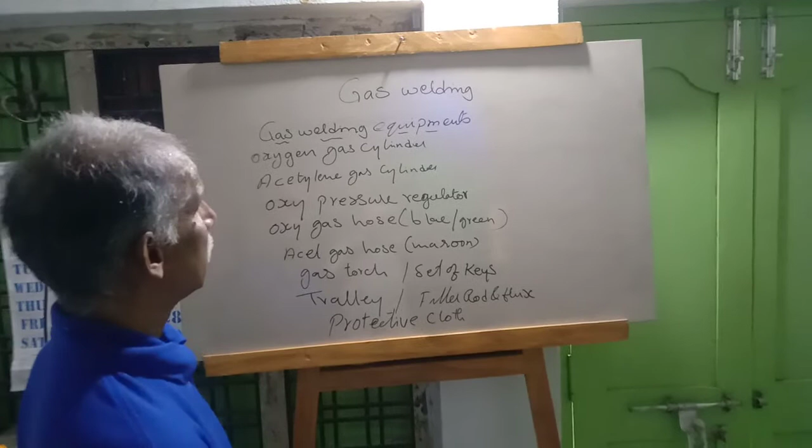So, the last class we were learning about gas welding, how gas welding works and what gases are used for gas welding. Now, to do gas welding, there are different types of equipment we have to use to complete that work. Let's see what all are written here.

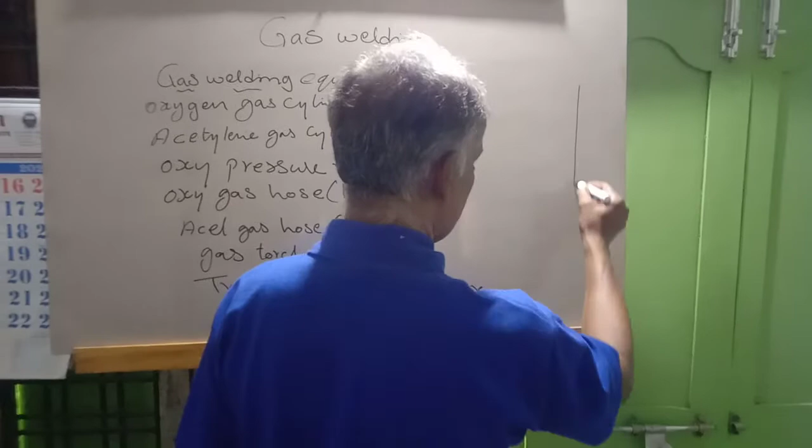Okay. Now the first one is the oxygen gas cylinder. This oxygen gas cylinder is the same as our cooking gas cylinder, the way we use gas cylinders. This gas cylinder is very tall, made with cast iron, completely one single piece made with cast iron, and having a valve system here.

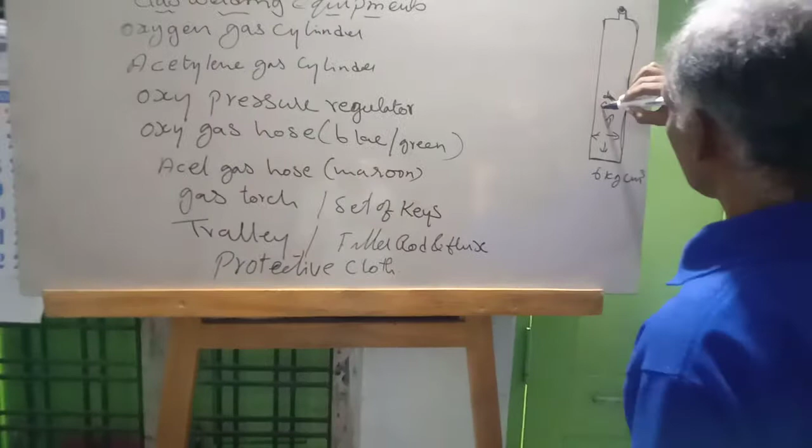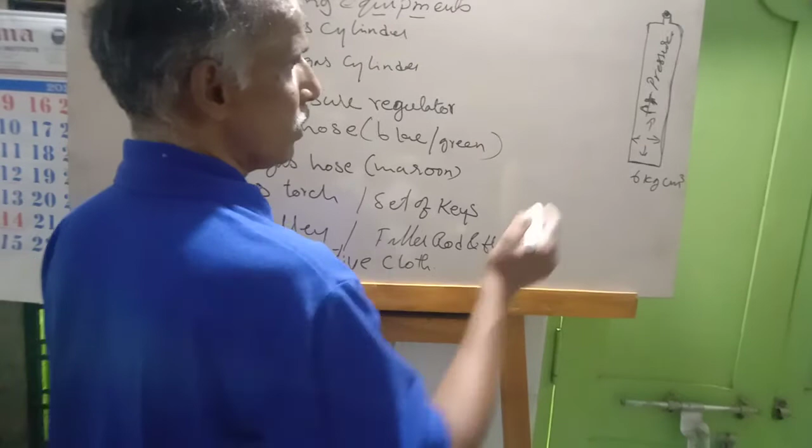And oxygen is filled in this with a pressure of 6 kgs per centimeter square. That is the oxygen pressure inside this cylinder. So it is very dangerous if the nozzle where the gas is coming out, the mouth of this cylinder, is leaking. You have to be careful. Keep it aside. It will be very dangerous.

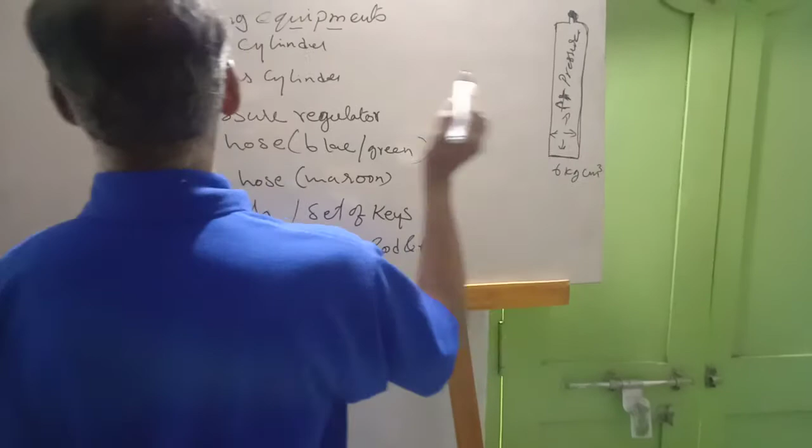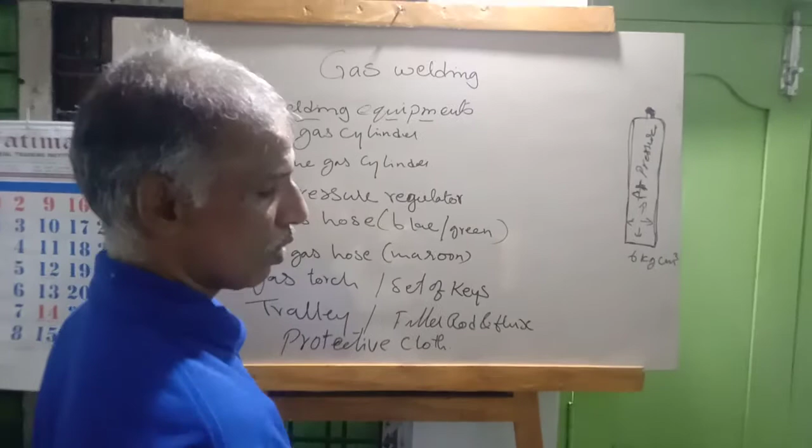Okay. Now this oxygen cylinder which we use has to be handled carefully in vertical position only. With cooking gas, people sometimes put it down and roll the cylinder to take it. You should not put these cylinders down and roll them. They should be transported vertically from one place to another place.

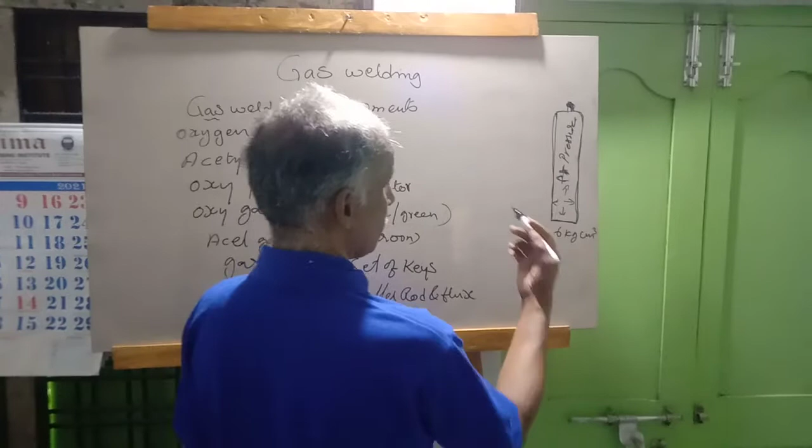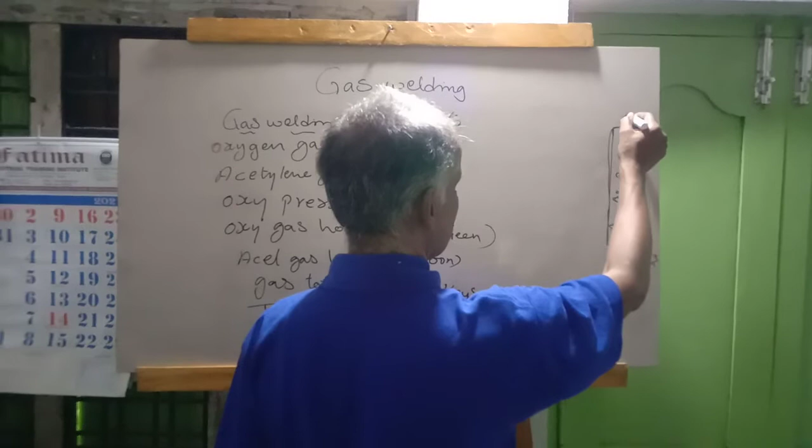And the same way, the acetylene gas cylinder also we have to handle. Approximately the same pressure is also in this cylinder. And when we are using this gas, it has to be transferred from the cylinder to a gas welding torch through the pipe, the hose pipe.

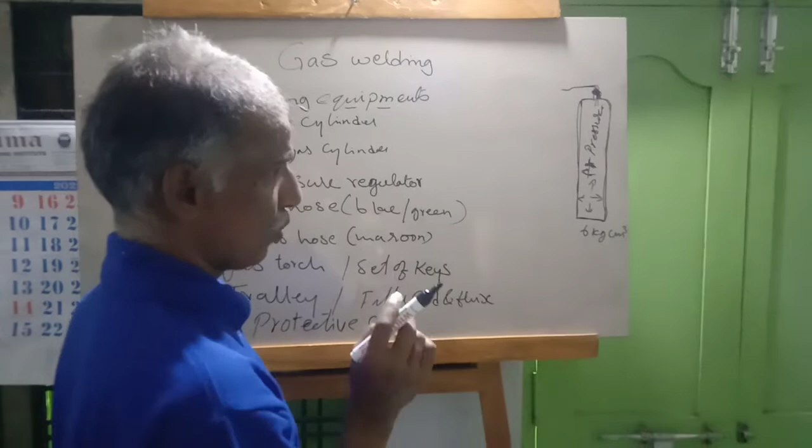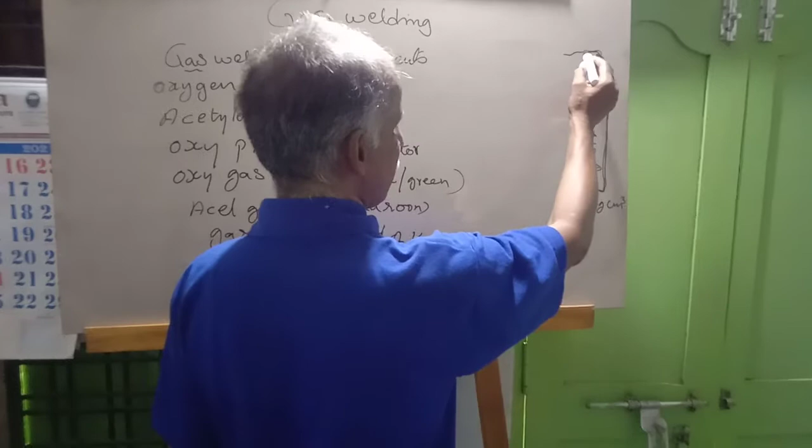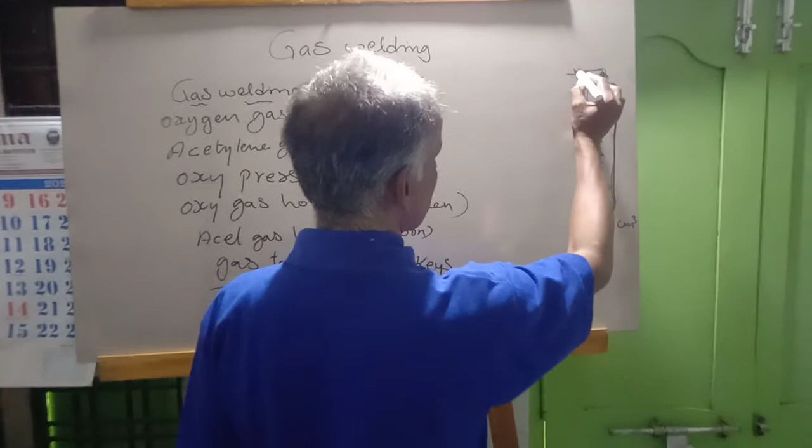Okay. So when you are supplying this gas through this pipe, you should regulate and send only as much gas as is required. If you open the pressure too much, the pipe will expand like a balloon and it will burst. So be careful how much it can withstand. On the hose pipe, the pressure it will withstand will be written. So how will we know how much pressure of gas is going through this pipe?

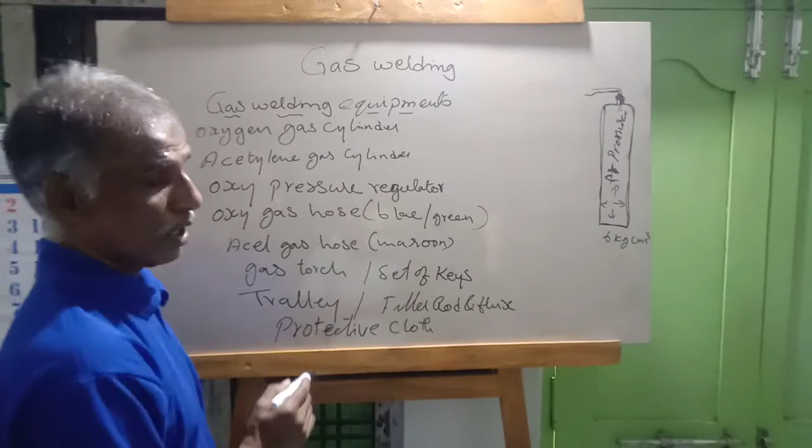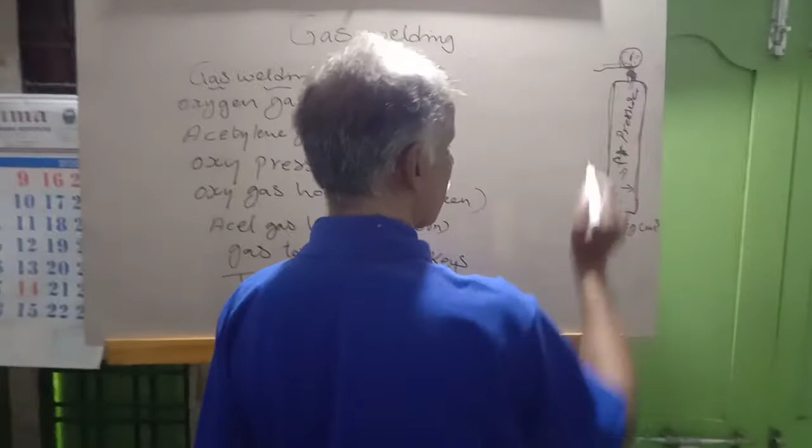For that we are using the oxygen pressure regulator. Here one regulator will be there, which has a dial and a handle. When you open this nozzle, we have to use the correct type of equipment to open it. Don't use the wrong equipment, for example keys or a spanner. It should suit perfectly.

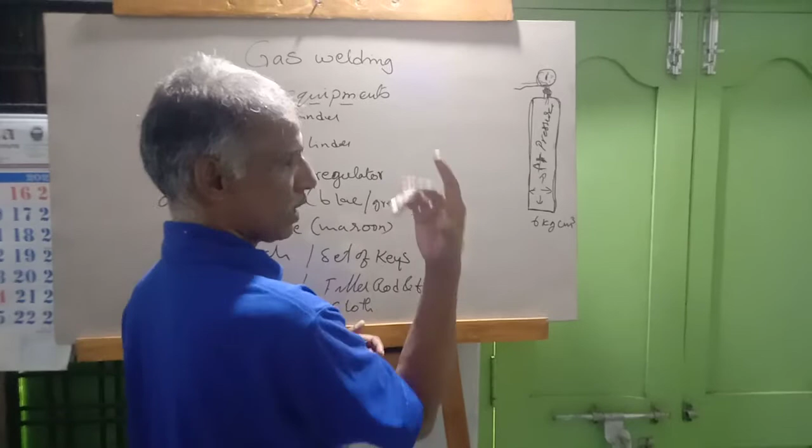Don't adjust using other keys, loose or tight spanners, hitting on it. Because the cylinder has a brass fitting at the top, it can be very brittle, it will break and the gas will leak. So if you notice that gas is leaking, keep the cylinder to the side.

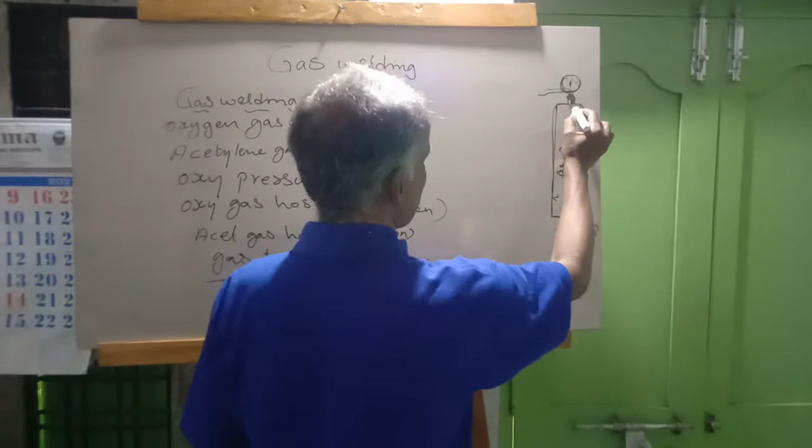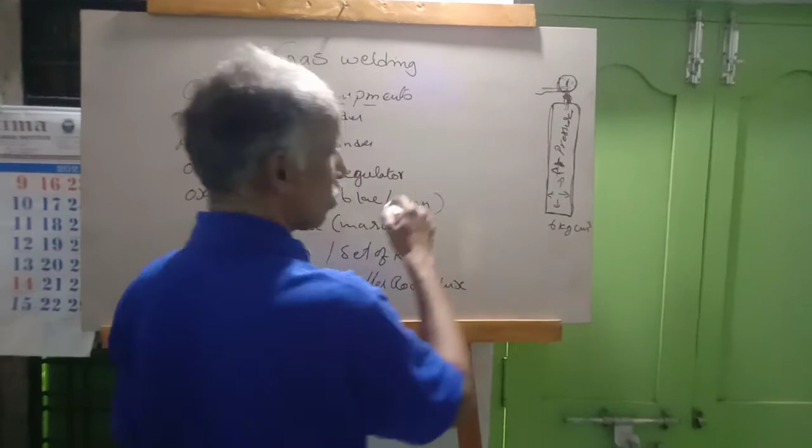Now to connect to this cylinder, we connect the regulator to the cylinder, and we supply the gas. When you are supplying the gas, the dial will show how much pressure you are sending. The gas sent through it will not directly go out of the torch. Near the torch we have one more regulating system, a valve, like a tap at home. However much water we want, that much we open, and that much water comes.

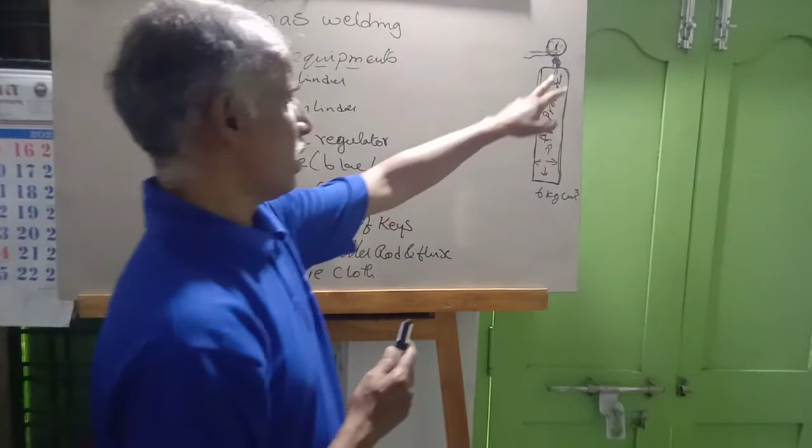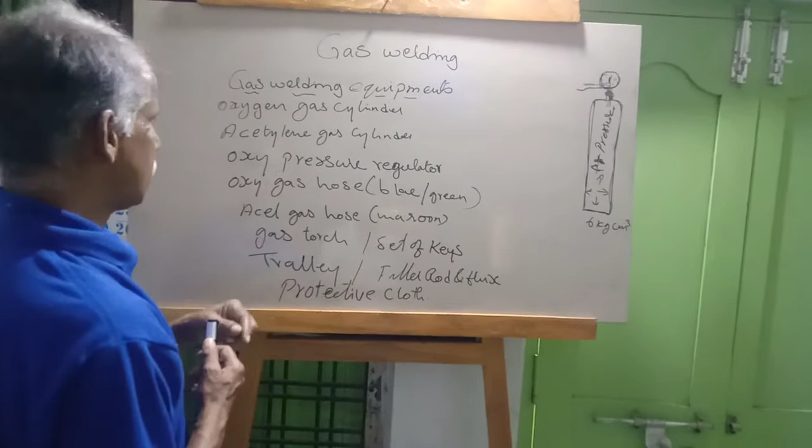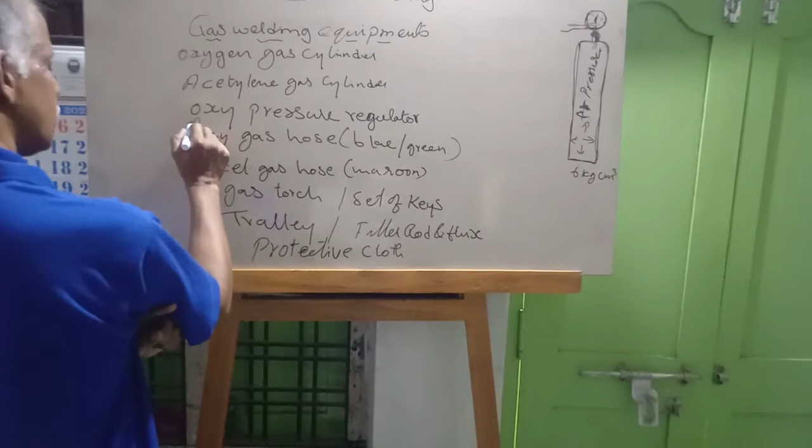Same way, we have one more valve, which is adjusted by rotating the thumb nut. So the oxygen pressure regulator is fixed here, and for the acetylene gas also we have to use an acetylene gas pressure regulator for the other cylinder. These are both cylinders. Okay.

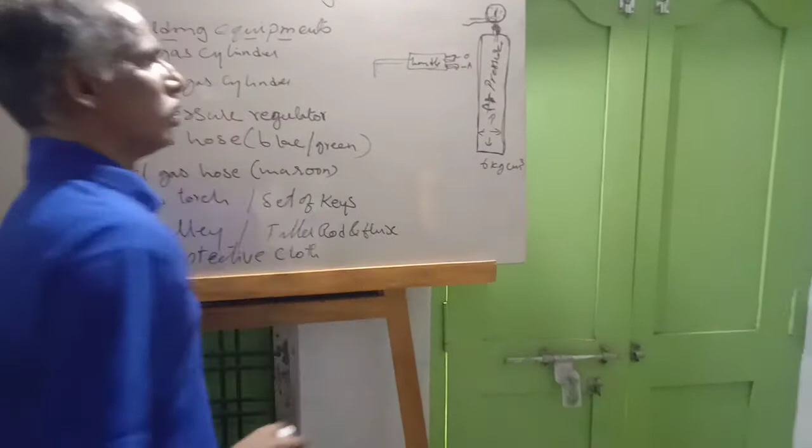Now, the oxygen gas hose pipe. Let's see the pipe. This is a torch. Two inlets are here, one for oxygen, one for acetylene. This is the handle. We have to send the oxygen and acetylene through this. Here we have two valves which adjust how much oxygen goes.

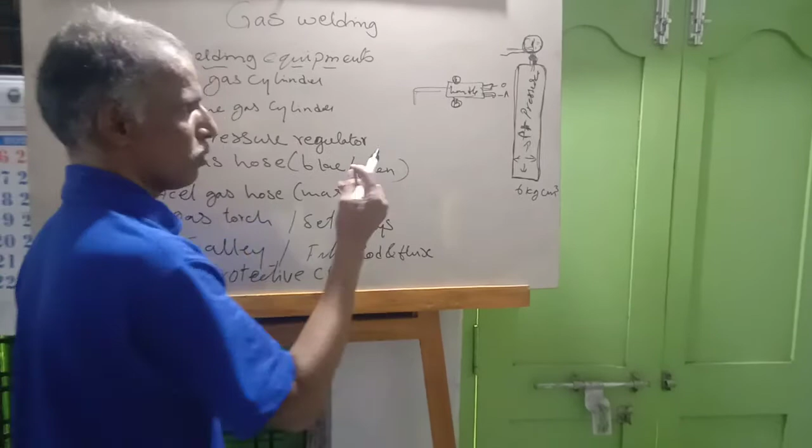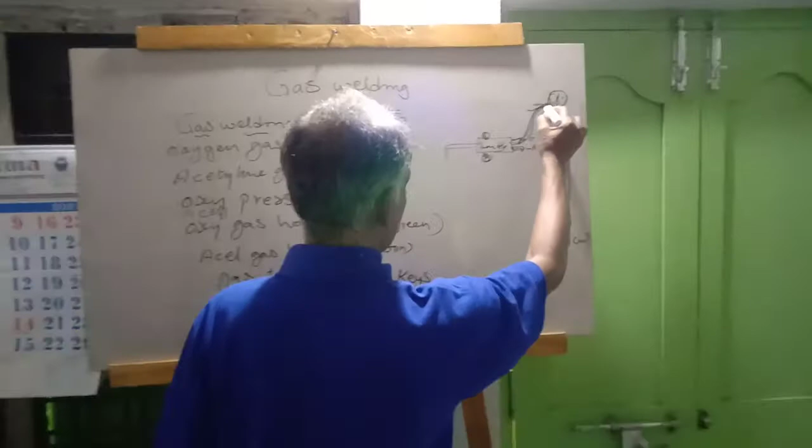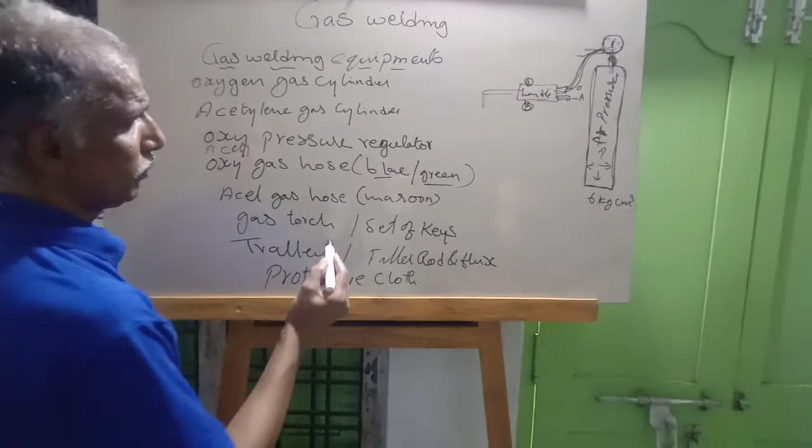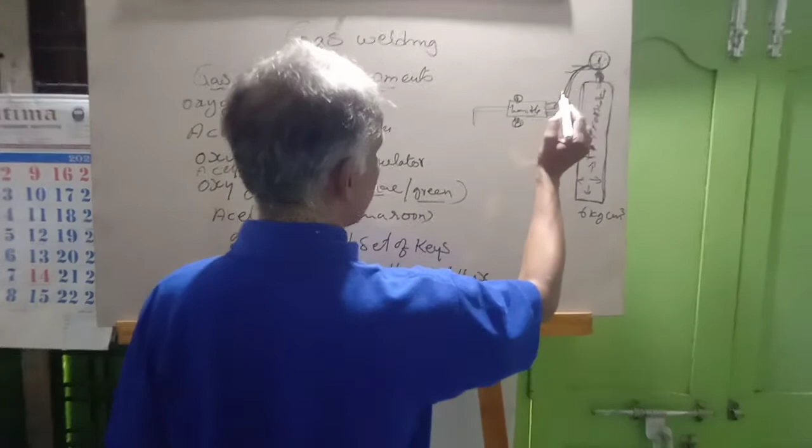To fix the hose pipe from the oxygen cylinder to the torch, we should use a blue or green colored pipe. Blue or green pipe. Okay. Sometimes people misuse it and the green pipe gets fitted elsewhere, and when handling you will get confused. So the oxygen connection has to be fitted systematically.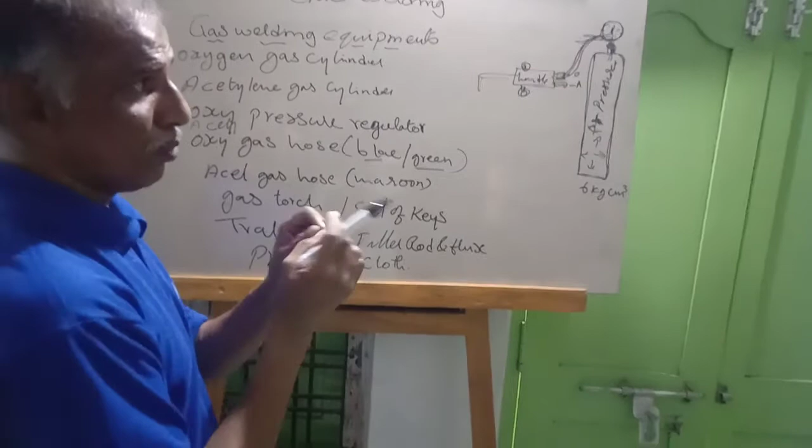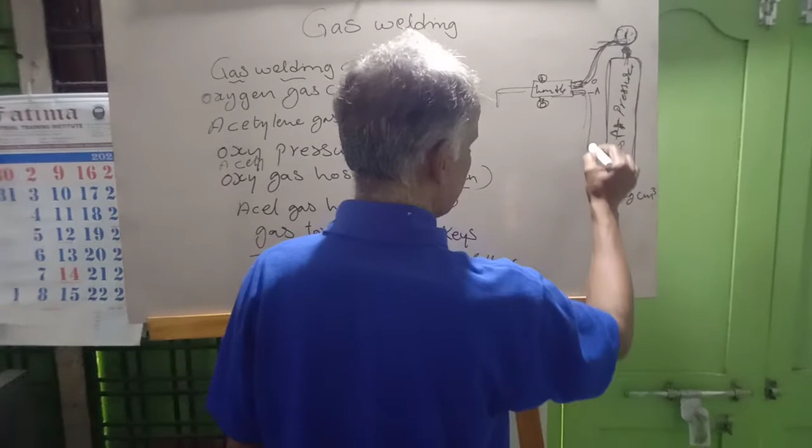For the torch and regulator, we have a union nut and bolt system to tighten it. And here we have a clamp; sometimes we use hose pipe clamps. So what color should this pipe be? Blue or green. Now for the acetylene gas hose pipe, the pipe color we have to use is maroon.

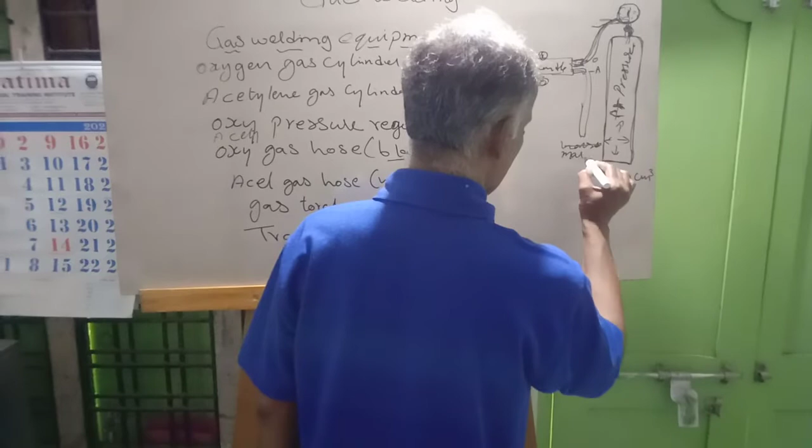Okay. What happened now?

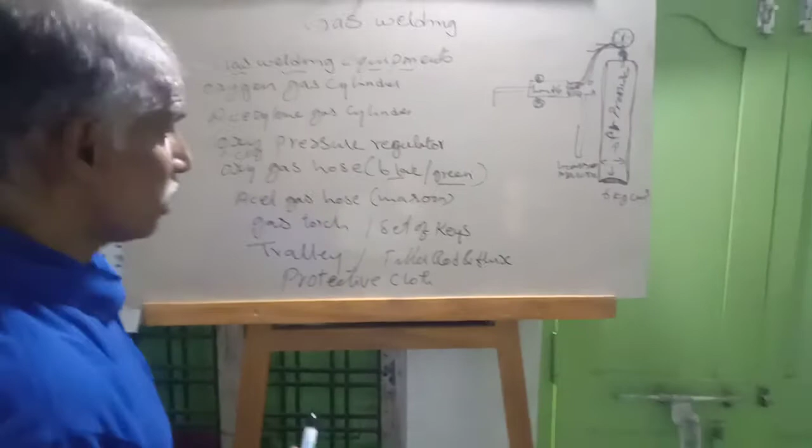So for the cylinders also, at the bottom it will have a concave inside. At the bottom, they will put the color for oxygen cylinders and acetylene cylinders. See, both the cylinders will be the same height and the same way. So to recognize them, at the bottom they will paint the color, maroon for acetylene and white for oxygen.

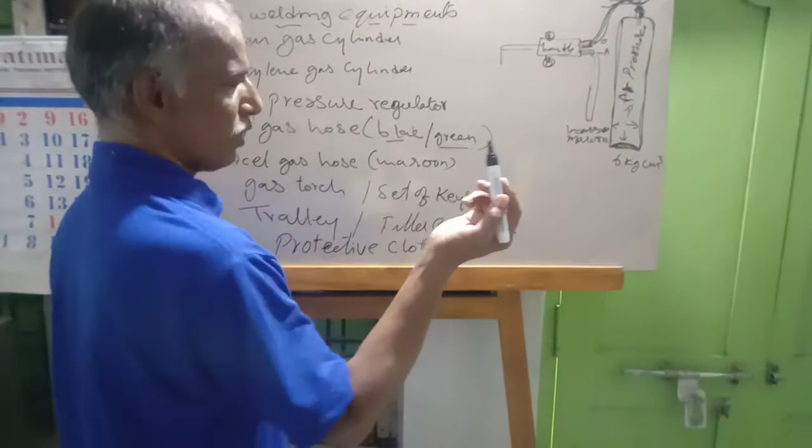Maroon color for acetylene, white for oxygen. These two colors will be put on the cylinder. By seeing this color, we will be knowing the difference of this

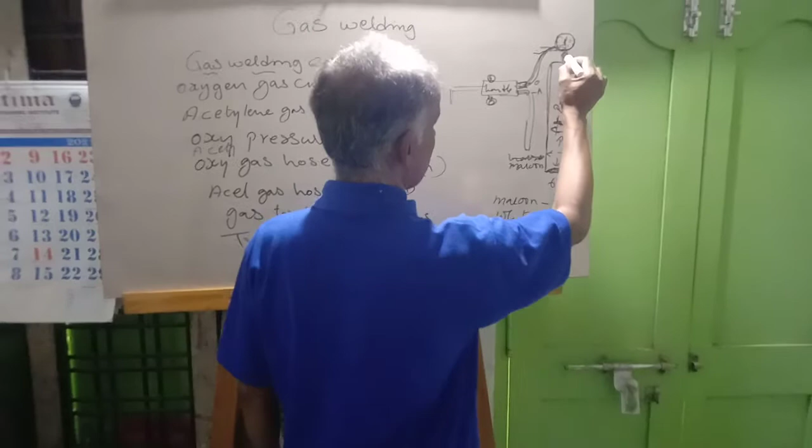acetylene cylinder and oxygen cylinder. To recognize, the regulator we are fixing to the cylinder will have left hand threads and right hand threads. In the next class, when we learn about these cylinders, we will learn what type of threads the cylinders will have.

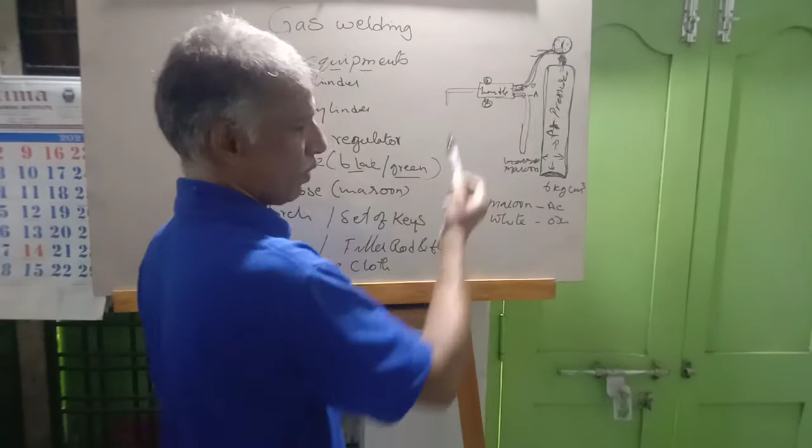Now, next one is the gas torch. Here, this is a gas torch. Okay, how this gas torch works inside means,

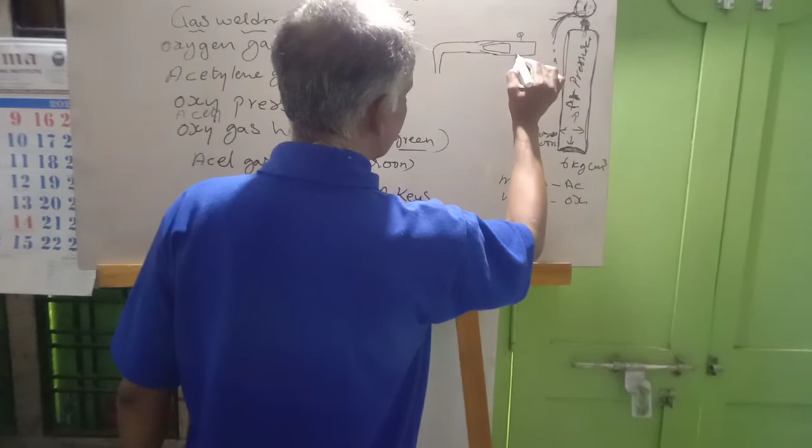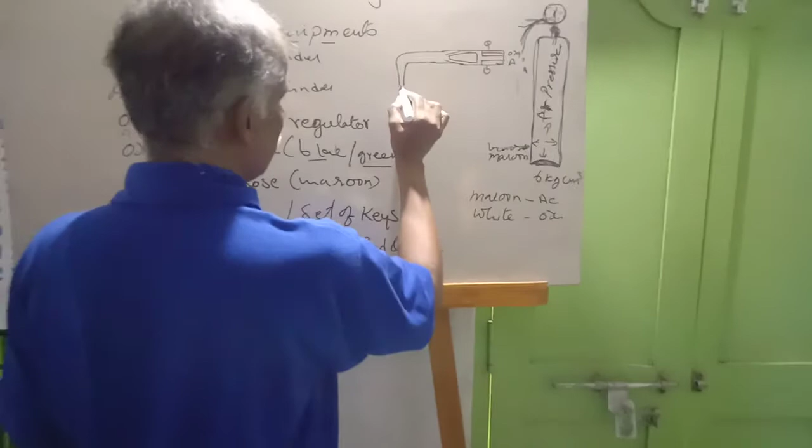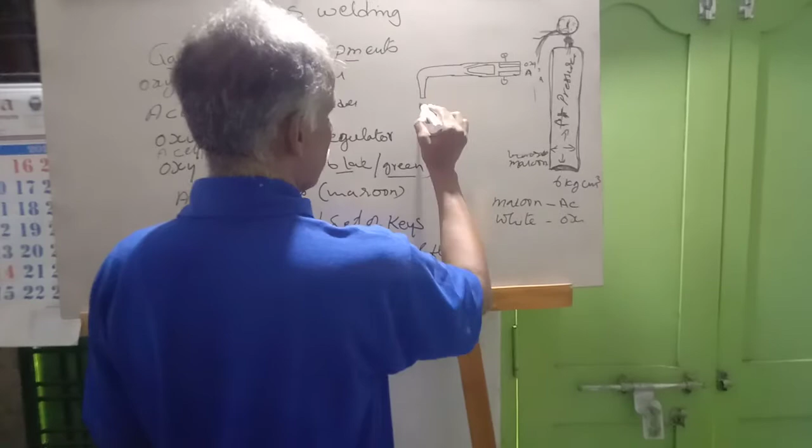See, first we have to light the torch. So first you supply the fuel, that is acetylene, a small amount of fuel, and light the flame at the nozzle. After the nozzle gets lit, you slowly supply the oxygen.

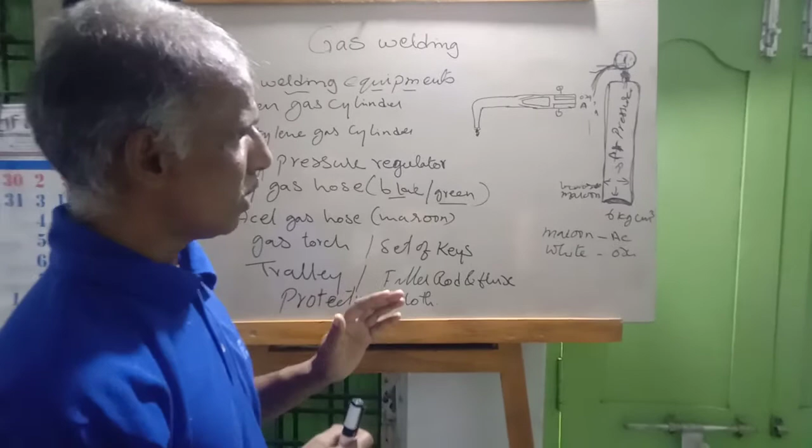See, to burn the fire and help the fuel to burn for a long time, we need oxygen. If you are not allowing the oxygen, a full black smoky flame will come with all dirty black color. So when you supply oxygen, it will stop.

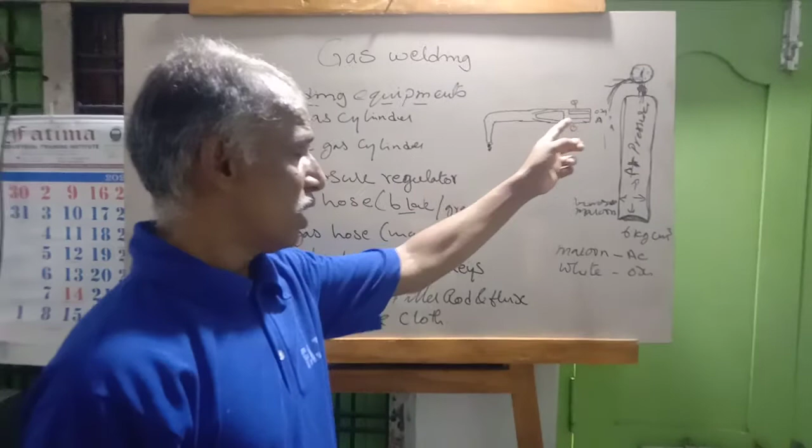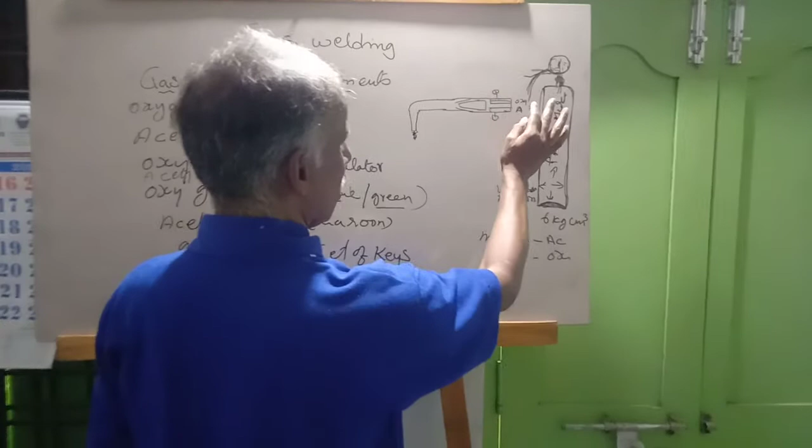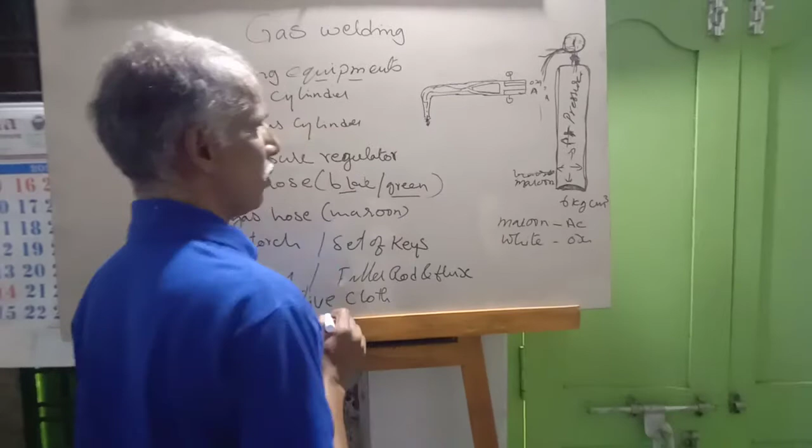And the supply of oxygen and acetylene we are controlling with these two thumb screws, and we are opening proportionate acetylene and oxygen. Both will go through this taper nozzle and mix here. Okay, two pipes will be there. They come and mix, and here it will get the flame. This is a torch, gas torch.

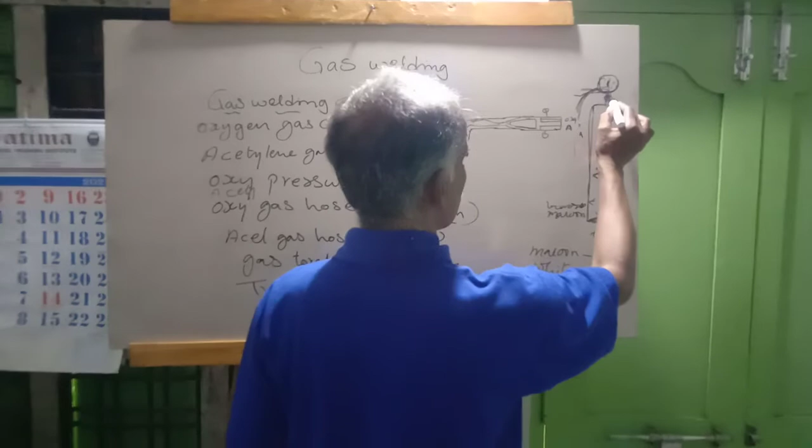Now, set of keys. What does set of keys mean? See here, to open this, this fitting, here we will have a nozzle, one opening here, and a square. So here this fitting is like this. This is the cylinder, and the fitting is there. Here a square key is there.

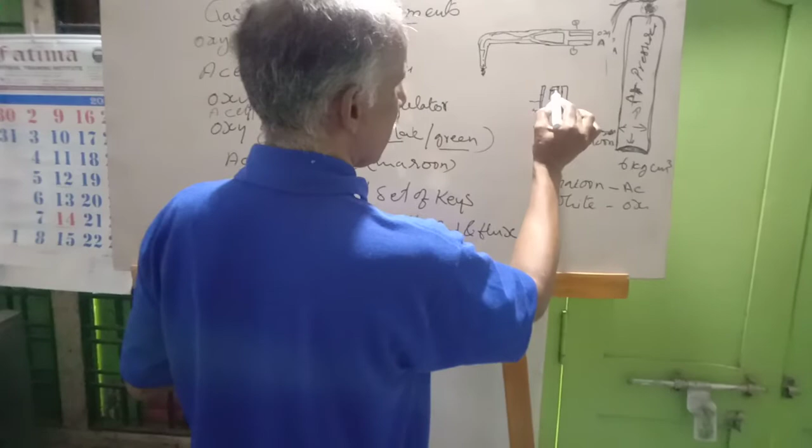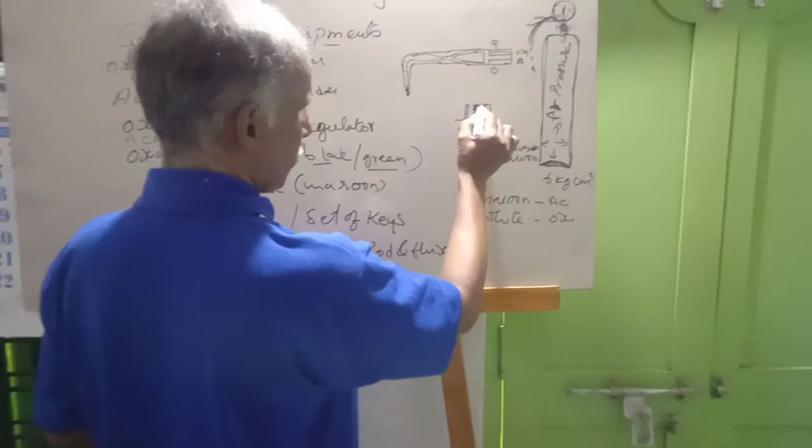To open this, square rod, this is a valve. To rotate this one, we are using a perfect key, which will exactly fit the square. These keys we are using here. And for the regulator, which we fix at the side like this, one union will be there. To fit this nut, we'll use a spanner. Use the correct size of spanner to fix this nut.

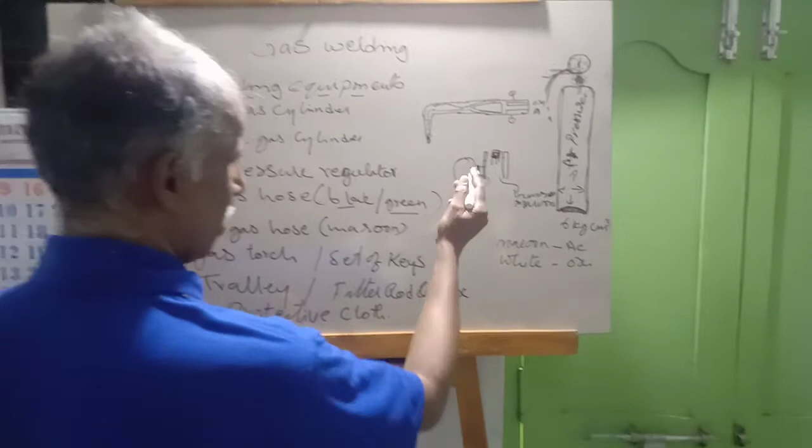Okay. That is what they mean by set of keys. A spanner or keys, you have to use the perfectly fitted one only. And

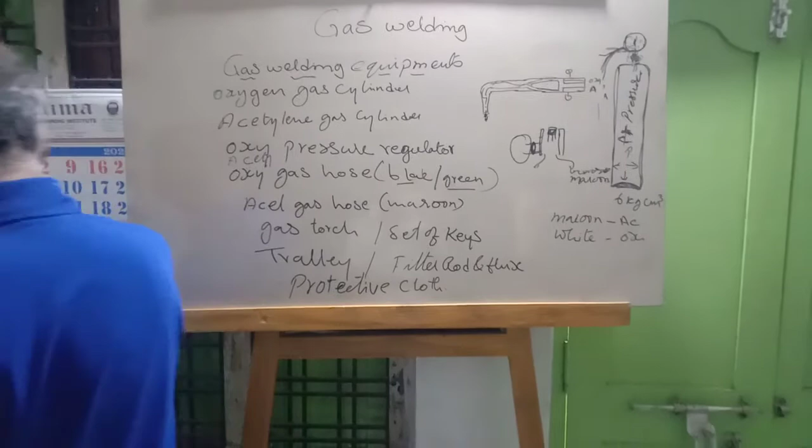trolley. What is this trolley? See, to transport the cylinder vertically from one place to another place is a little bit difficult. To avoid that, we are using a trolley where the oxy cylinder and acetylene cylinder are kept on the trolley and fixed to the trolley.

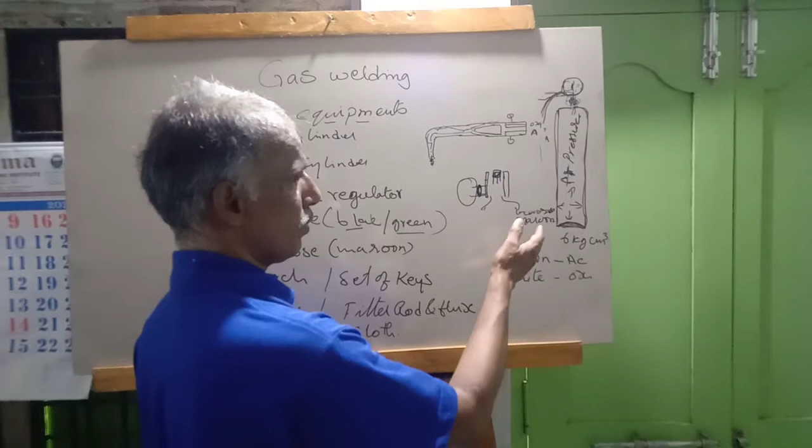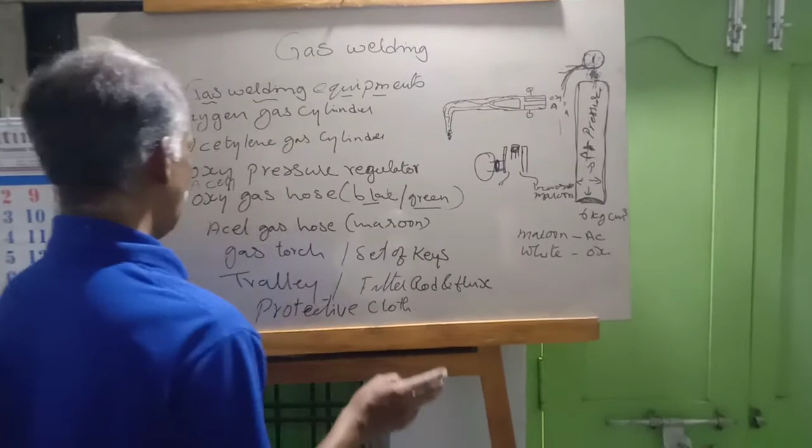And this is portable, so where we are doing work, we can shift it in the workshop from one place to another place. When we work one time in one place and another time in another place, shifting vertically is not possible. So we are using a trolley on which these two cylinders, oxy cylinder and acetylene cylinder, are kept. And

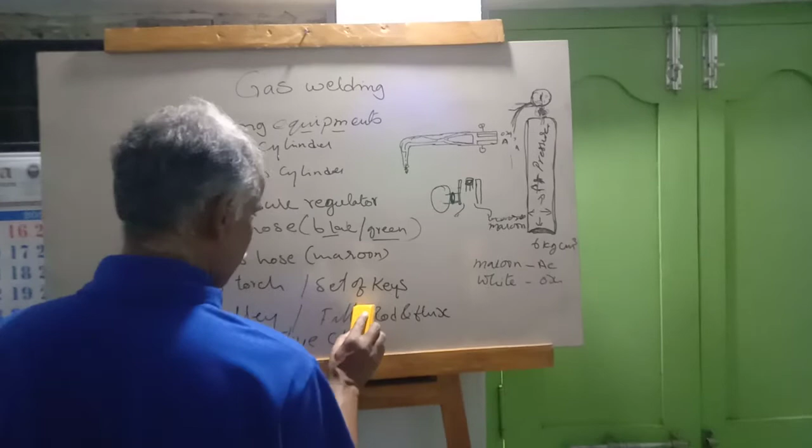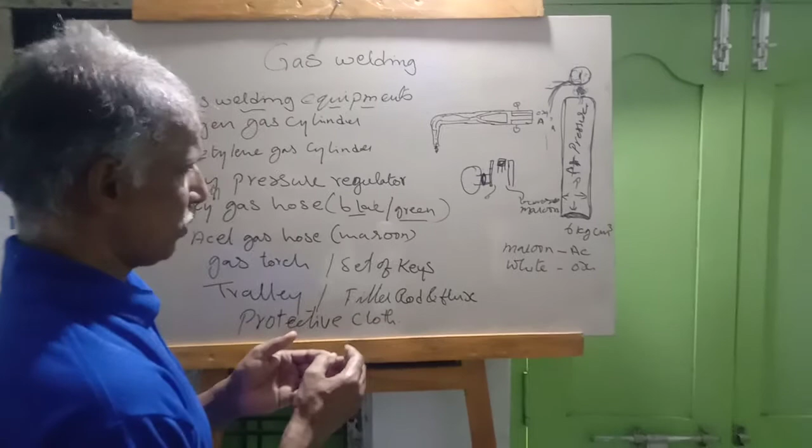filler rod. This is not filler rod. Filler rod and flux. To join two flat pieces or sheet pieces, metal pieces, we have to use a filler rod. To join two pieces with filler metal in between, we have to use filler rod, and including that we have to use flux also.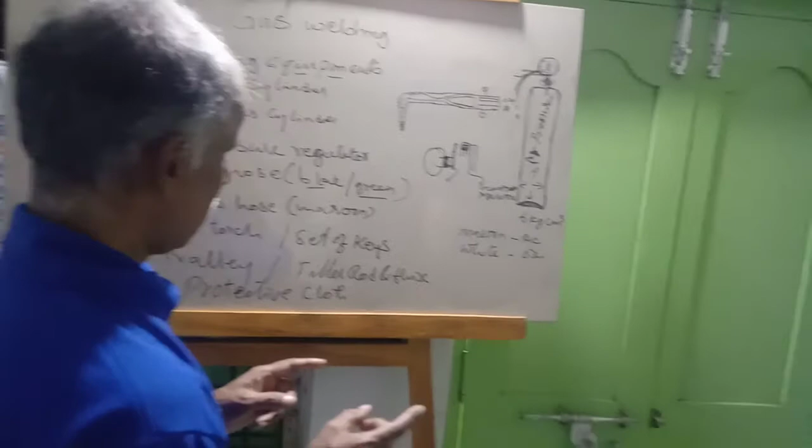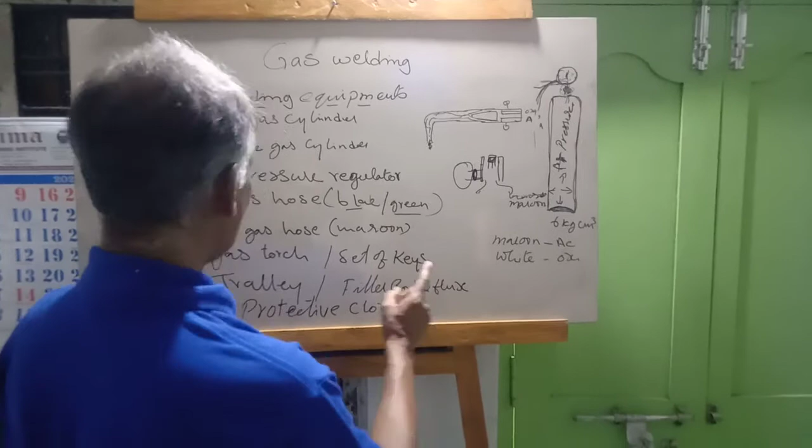In the last class, when we were doing the soldering lesson, what did we learn? The flux is a cleaning agent used to clean the surface of the welding portion, and it will allow the filler metal to flow properly and weld. That is called sweating. Good. So filler rod and flux. Here in gas welding, the flux we are using is borax.

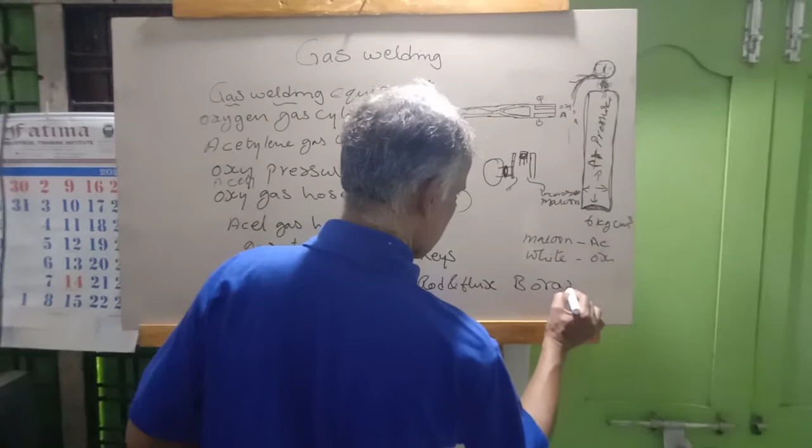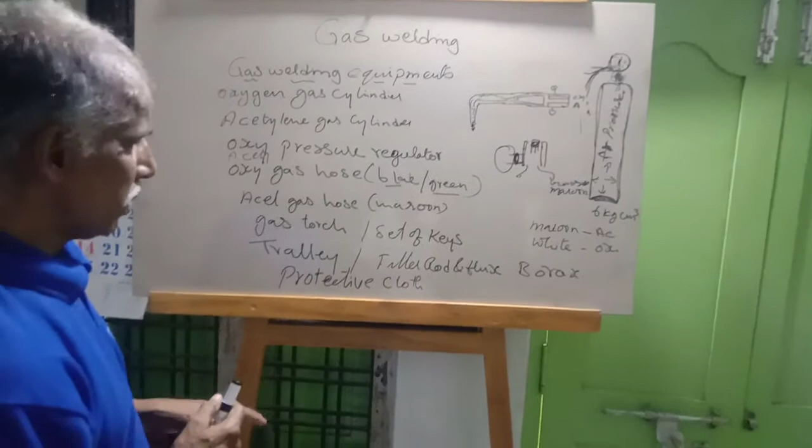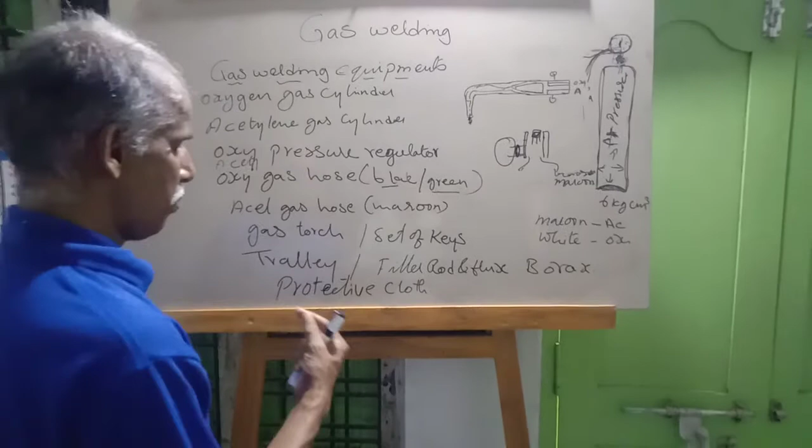Okay. Now, wear protective clothes. Wear protective clothes means, because we are working with the direct flame, don't use synthetic clothes, use cotton clothes. Over that, you put on a leather apron, gloves, goggles and all to protect yourself.

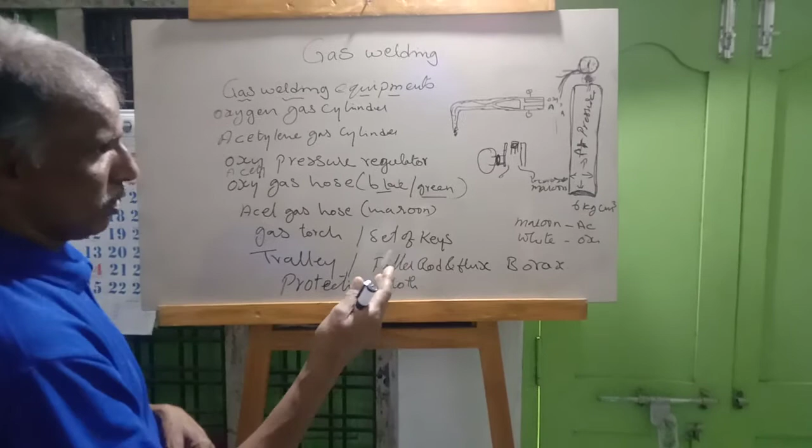And same way, not only yourself, we have to see the safety of the other people working nearby also. So when you are doing gas welding, you have to be careful and check that the other persons are not affected by any gas welding accidents.

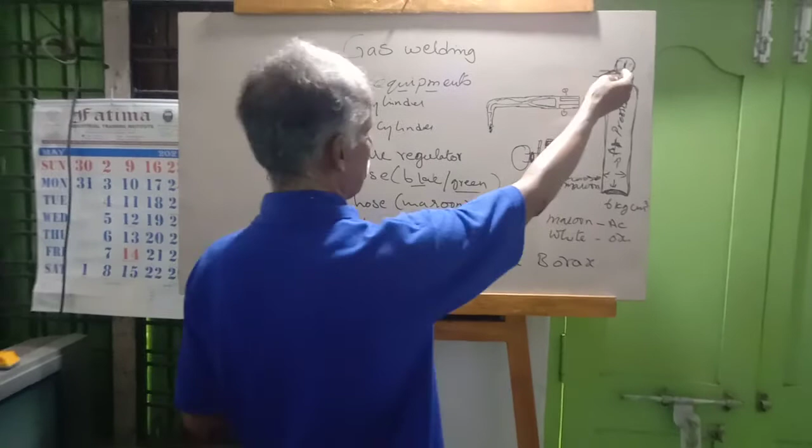Now while you are working, if any leakages are there, you have to check. So how to check the leakage? Take a little water. If you have any doubt, pour it on that, and bubbles will come. Or pour soap water on it, bubbles will come anywhere a leak is there. Immediately you have to stop. These are the gas welding equipments used for gas welding.

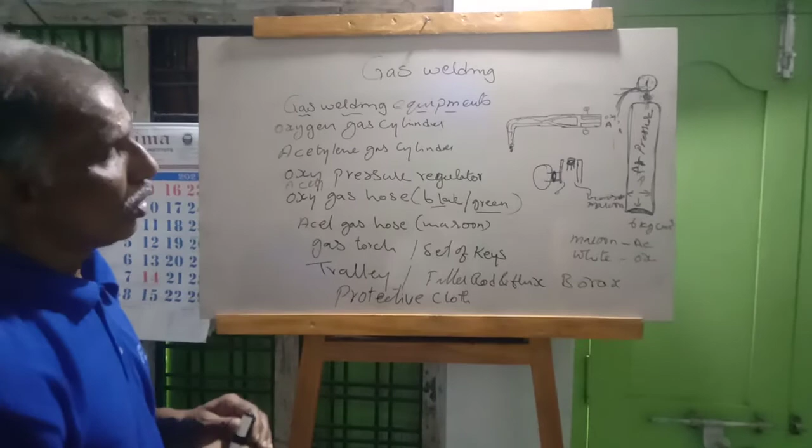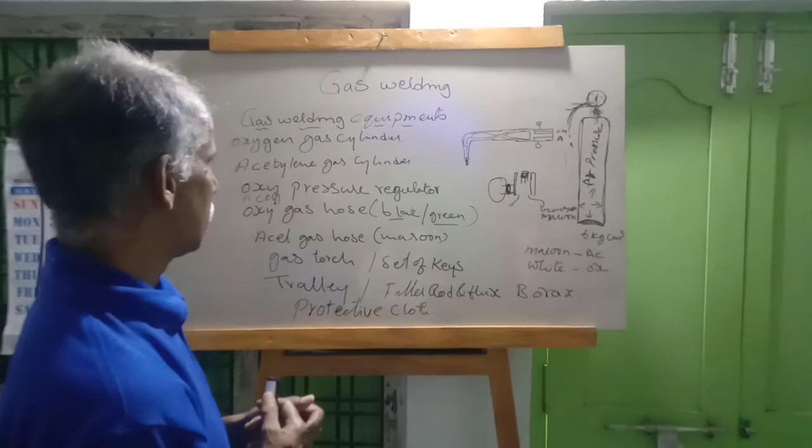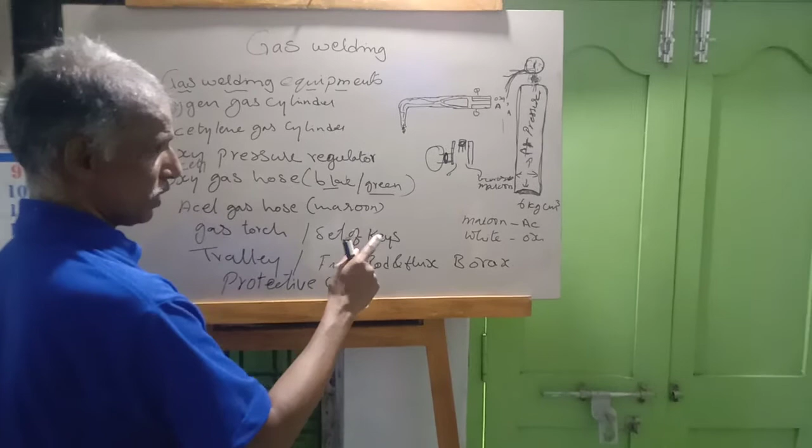So how it works, method of working, what are the... while working, we will face some problems with it not working properly. When this equipment is not working properly, it is very dangerous. It can burst, sometimes it can blow up also. So to avoid this, we have to regularly check these things by checking leakage and all.

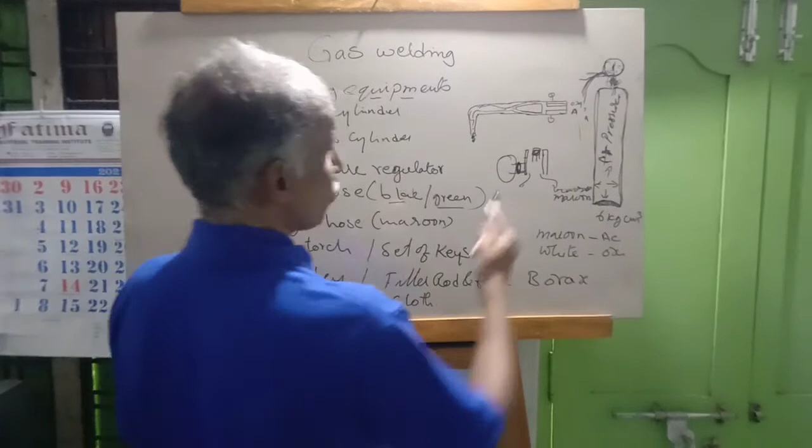And see, the hose pipe is made with plastic. When you are doing hot work, hot things should not touch the hose pipe. And the hose pipe should not go over sharp edges or metals like that. Sometimes the hose pipe will get cut. These are all the safety precautions you have to observe when you are using these gas welding equipments.